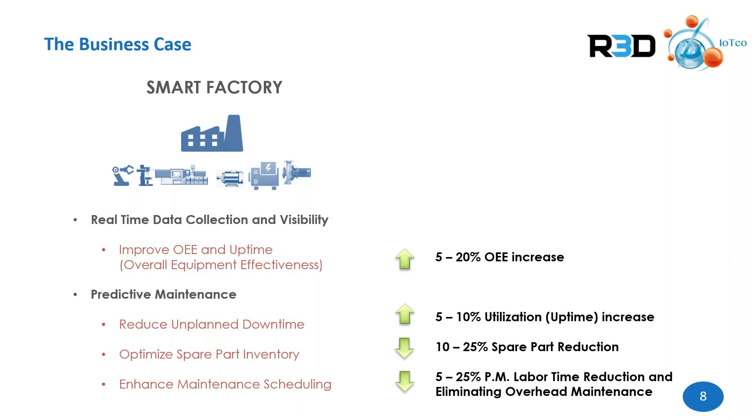So business case drives technology selection and drives the behavior and strategy of digital transformation. One of the first return on investment calculations we've ever done was with an automotive OEM with a lot of industrial robotics, where we deployed an AI predictive maintenance solution. And in that plant, the average cost of 1 minute of downtime was almost $10,000.

So it is significant. You're not making cars. If the line is down, you're not making cars. So if we are using AI and we're looking at how many failures actually happen in a year, let's face the facts, robotics don't fail all the time. They're very rigid equipment. But when 30 of them on average fail every year, with 30 minutes of estimated unplanned downtime...

...leading to such a single robot failure value that you see here, using predictive maintenance and having or even under promising the prediction accuracy down to just 50%, so only catching 15 of the 30 robot failures, this automotive OEM was able to achieve such a strong result from applying AI and predictive maintenance in their factory.

Now, I'm not saying that your 1 minute of downtime is $10,000, but think of what your 1 minute of downtime costs you, and how many unplanned asset failures you usually have per year. Simple math here based on uptime and based on prediction accuracies, which by the way can reach 80 to 90% in a real world setting, can give you a very quick ROI calculation by just looking at uptime improvements and moving towards a predictive maintenance approach.

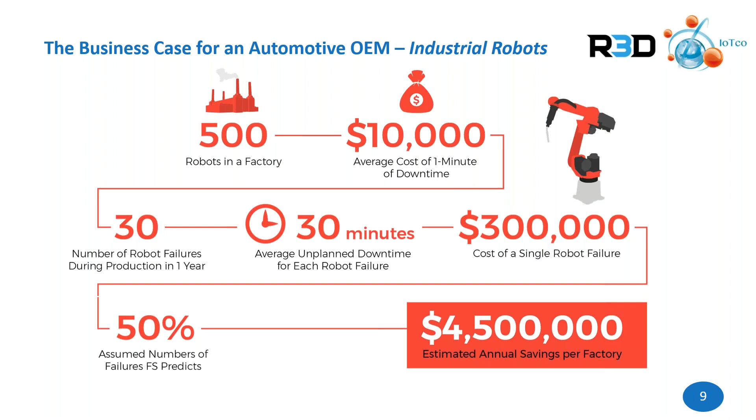So when we look at two case studies briefly, we always think, what is the value? What is the velocity of doing the work? What is the scalability of the work? And what's the ROI? These are the four key metrics that we look at to assess our digital transformation success.

And when we look at a company like MAXION Wheels, a predictive maintenance solution was deployed there in less than 3 months on 7 of their most critical asset types. That proved value within 6 months to the manufacturing company and was scaled as a template to over 10 manufacturing facilities in their steel division.

When we're looking at Bocar with high pressure die casting equipment, we're looking at high scrap rates. Artificial intelligence can be used not only to predict maintenance issues, but also to predict scrap and quality issues in the manufacturing floor. The casted parts are running with a cycle time of almost 10 seconds. So the AI solution has to make very rapid decisions in less than the cycle time of the part, within almost 6-7 seconds, to automatically scrap a part or accept a part based on big data collected from the casting cell, almost 50 parameters.

So here, we're not just telling them if the machine is going to go down, but we're actually prescribing to the machine to make a decision to accept or reject a part.

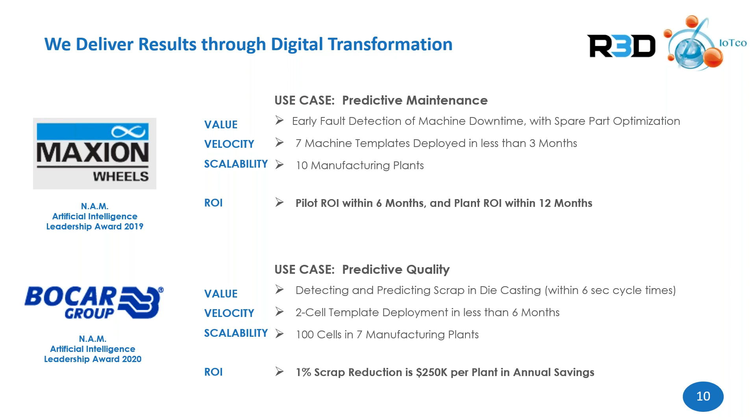The National Association of Manufacturers actually awarded both organizations the AI Leadership Award last year and this year. So ROI dictates technology and dictates the use case. So what is the technology behind all this?

We see a 3-layered approach. We always refer to the data lake. And if you don't have the data lake, it's important that we partner with you to create that for you.

So we're collecting data from the asset, the process, the quality, the workers, and in a standardized fashion, this data can flow into an artificial intelligence-based solution engine that can deliver you the use cases to deliver you that business case.

Predictive maintenance is focusing on the machine. Predictive quality is focusing on the part that is being produced by the machine. So we talk about predictive metrics, health of the machine and the components, and prediction of when the machine might fail before it fails - remaining useful life.

And on the scrap side, we're talking about, is this a healthy part? Green, yellow, red - is it going to pass? Is it a warning, a suspect, or a predicted defect on the part? And then what is the reason for that defect - is it a temperature parameter, a pressure parameter, that is leading to the failure on the part that I'm predicting?

So zero downtime, zero scrap operation is the vision that we have - a worry-free process for manufacturers to use connectivity and analytics and drive shop floor improvement. And we do it in a very systematic way. You do not need a data scientist or a PhD on staff to utilize these solutions.

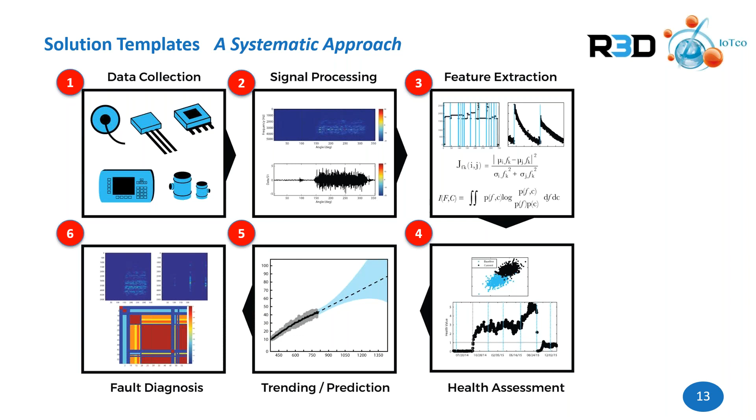And then how to train a machine learning algorithm that can learn the baseline and then trend the behavior, which is your health over time, and then start to offer predictions and diagnostics on what is the root cause of the failure and when the machine might fail before it actually fails, shifting away from a reactive approach and a time-based approach to maintenance to a more proactive and predictive approach.

So now the question becomes, there's a lot of variety of machines on the factory floor of different types and different ages and different processes. So there comes the idea of solution templates.

I have robotics on the factory floor with different axes, and each axis has a bearing, and the joints might fail as you're moving the robot over time. So predictive maintenance of each axis of the industrial robot, whether it's a FANUC, a KUKA, a Denso robot, it doesn't matter - robot agnostic.

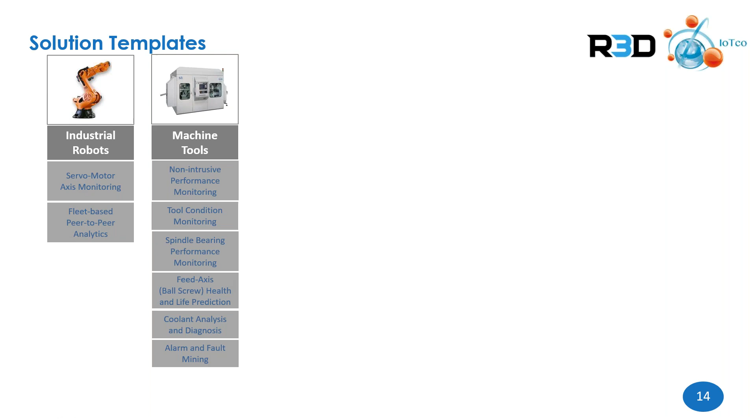I have machine tools, CNC machines. I have spindle bearings that might fail, or ball screw feed axis that might fail, or my coolant, my lubricant might degrade over time and cause an issue on my part. So a series of templates relating to CNC machines.

I have injection molding equipment and high pressure, low pressure casting equipment, where not only maintenance is important, but also predicting quality and defect issues is important.

I have stamping equipment, vibration-based analysis on specific areas of the carriage and the die may be crucial in a stamping area. We've also done projects where we use sound or acoustic to listen to the sound of the part being hit by the stamping press, and inferring from the harmonics of the sound - which you obviously can't hear with the human ear, but you can hear with a sensor - that this might be a bad stamp or the machine might be having a problem.

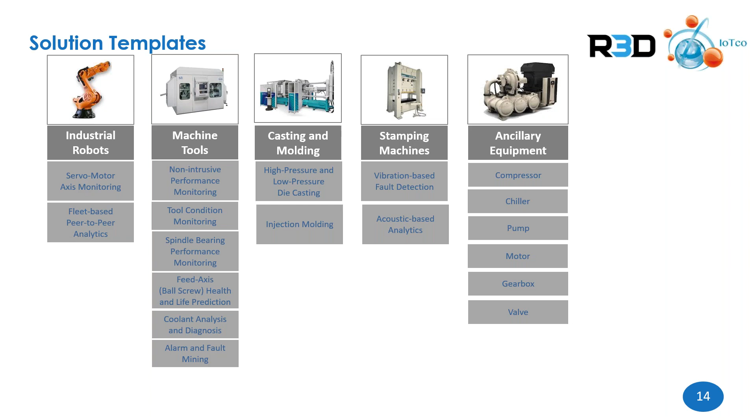So a more non-intrusive way, instead of having to mount and drill a vibration sensor, you're listening to the sound data. Or I have ancillary equipment surrounding the factory - compressors, pumps, motors, gearboxes - that might fail. So the idea here is a library of solution templates where the connectivity is well understood and proven, and the AI and the analytics recipe is well understood and proven.

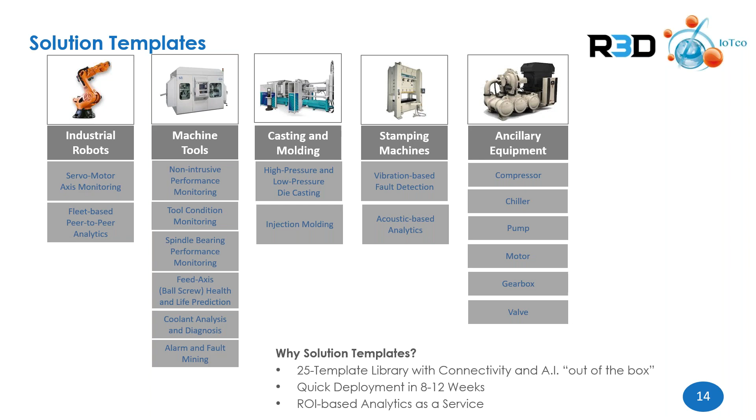Leading to rapid deployment in 8 to 12 weeks without the need of a data scientist or a PhD on staff that has to be able to configure these solutions. Our typical go-lives are very rapid, allowing customers to start using predictive analytics in a very rapid fashion, and then proving results in weeks.

So a very quick example, robotics. It's robot agnostic. When we look at predictive maintenance, we're looking at capturing belt issues, backlash issues, bearings, motor brakes, lubrication, maybe starvation issues on the machine.

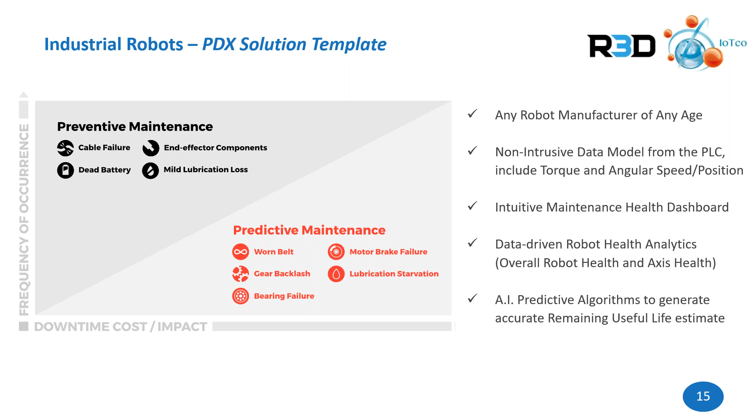These solutions should be intuitive. A maintenance person should be able to look at a dashboard and quickly make a decision without needing to be a PhD on staff. So when a maintenance person looks at a screen like this, they can quickly understand my asset is healthy because it is closer to the baseline.

My asset has started to degrade, and now I see a prediction window with an accuracy of when it might actually fail, and I have a 2 to 4 week window to actually react.

And I can see that my fifth joint or axis is going to be the actual key failure area on my robot. When we used to work at Toyota, we used to go and fix all 6 joints on all 6 axes of the robot in a standard operating procedure every few weeks. But with these solutions now, I can actually save labor time and save spare parts by going in and fixing a specific area on the machine, which is diagnosed by an AI solution.

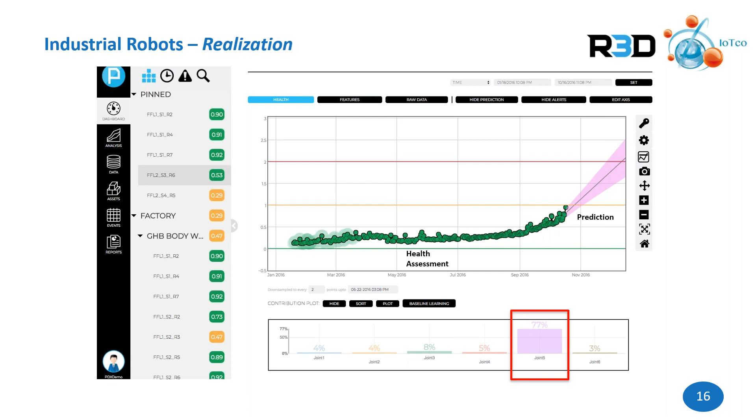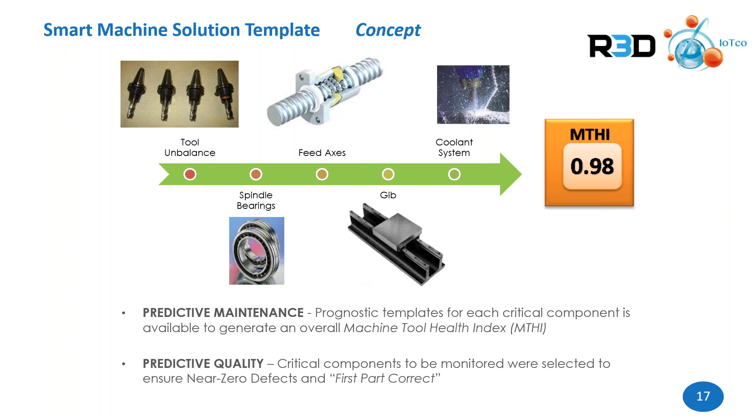When I look at a CNC machine tool, it is a more complex piece of equipment. You have a tool that moves, a feed axis, a spindle bearing, the coolant. So there are multiple templates and multiple areas of data collection that you would need here in order to deliver an intuitive solution with an intuitive dashboard to the maintenance organization so they can quickly see.

Hey, I want to look at my spindle. My spindle bearing has started to degrade. This is the remaining useful life of my spindle bearing. And I can clearly see that my SKF bearing has an 8 kilohertz frequency of failure, or BPFO, that's the outer race of the bearing or the inner race of the bearing.

So within a component like a bearing, we can even pinpoint very clearly which area of the bearing is going to fail before it actually fails. Very detailed or in-depth analytics can be achieved.

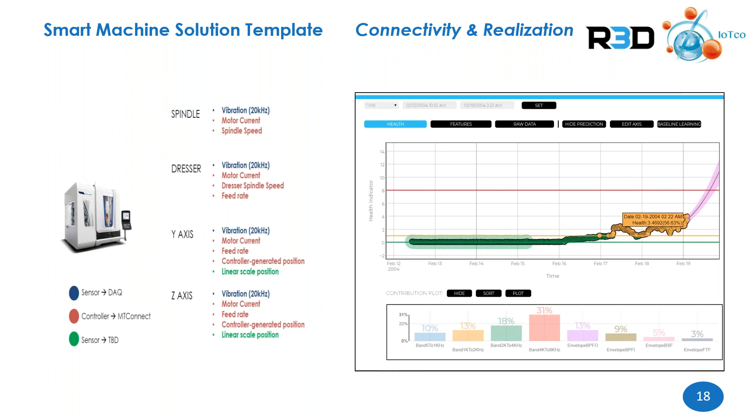So now that we're connected, now that we're collecting data, now that we're analyzing data, at the end of the day, such solutions can run standalone, but in many cases, we close the loop and we tie those solutions with a maintenance system so that the maintenance organization can use this data and these solution templates and start driving information to SAP PM, for example, to do predictive maintenance within SAP PM.

Most maintenance systems today are static and completely disconnected from the factory floor. So by having predictive insights and sending data to SAP, for example, we're able to support the maintenance team to optimize their PM schedule, assign labor to do the maintenance, and even order spare parts before they need the spare part.

So we've actually partnered with R3D on a special adapter to bring predictive insights like machine health, remaining useful life, and even requests for spare parts into SAP PM. And this is a very key integration that we're bringing out to all manufacturers.

So you can have proactive alerts and what we call predictive replenishment of actual spare parts, helping you reduce your spare part on hand and helping you reduce your labor time by having a closely knit integration with your maintenance environment.

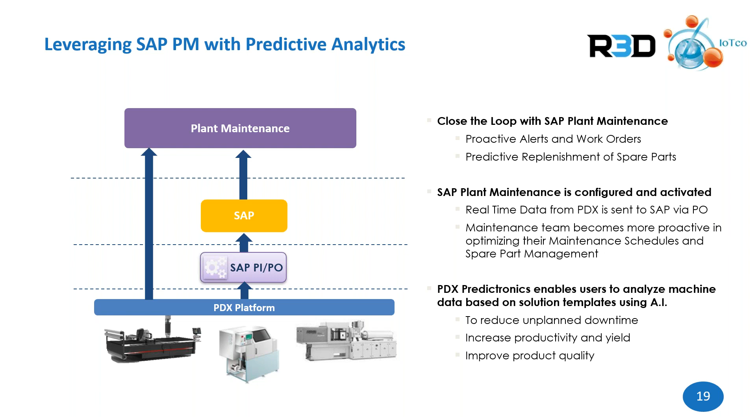So with this setting the stage of what's happening today in the industry, around ROI, business case, connectivity, analytics, leveraging your existing systems like SAP PM, let's set the stage for my good friend Isaac to tell you what their journey is and where they are today and where they want to be in the future.

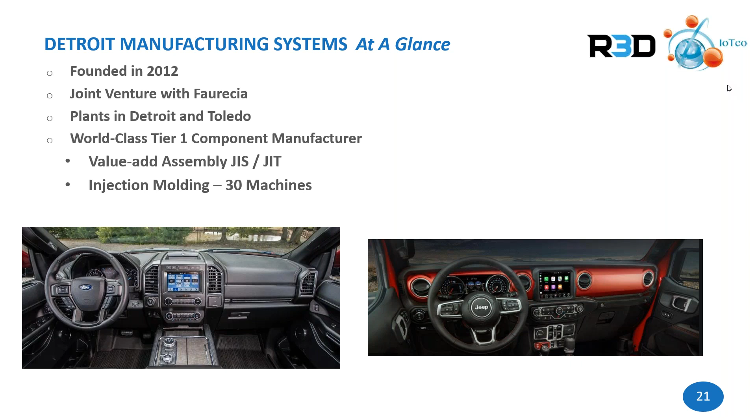I'm currently the head of IT at Detroit Manufacturing Systems. I have about 10 years experience in automotive. Before that, I did a lot of consulting with smaller businesses. Part of my experience is starting off in smart manufacturing, Industry 4.0, whatever you want to call it. For maybe the past 5 years, I've been delving into that and running projects having to do with that.

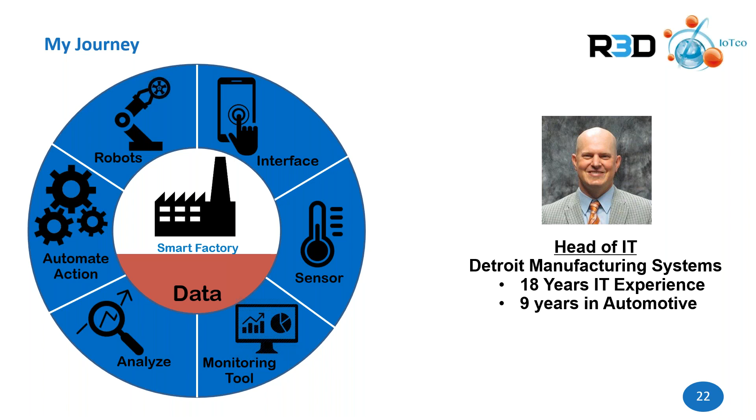Go to the next slide. I just want to give you a picture of what my journey was, and it'll give you an idea of where I come from, and also might give you an idea of what path you want to take. So I think it's important that I describe where I came from, what I am doing currently, and what I did in the past.

The journey really began with me managing plants and facilities in Europe, and then I also managed some plants and facilities in North America. The message I got while managing those facilities - and I managed the IT people, so let's get that straight, I was the IT manager or regional manager for Europe and for North America at one time - I managed the IT people in those facilities, in the plants, and that was really my first experience working directly on a manufacturing floor.

I'm big on communication, so I would often talk to the plant managers and see where I could help them. And the message that I got pretty often was, we need more help on the manufacturing floor by the IT department. In that process of talking about that and bringing that message to our CIO at the time, we decided as an IT department to come up with a presentation of how IT can help the manufacturing facilities directly on the plant floor.

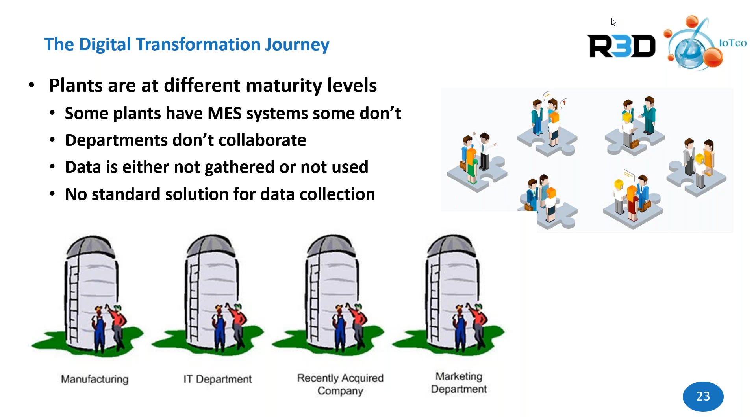So Mo, you can go to the next slide. As we went down this transformation and IT started looking at this stuff, it's very easy to get overwhelmed looking at the Industry 4.0 framework, the Industry 4.0 picture. There's a lot of different technologies that we started looking at, and we ourselves were a bit overwhelmed - how can we do Industry 4.0? Because it's such a huge concept, from cloud computing to augmented reality to smart sensors, data analytics.

In fact, I started back then - I think I was one of the first guys on the block to get an Amazon Alexa device, and I started buying smart devices for my house and seeing what I could do by talking to Alexa. And that for me was a microcosm of what you could do, or possibly do, in a manufacturing environment.

But also we quickly realized that, okay, let's look at the core concepts of Industry 4.0, and Mo alluded to it, it's data and analytics.

And I would add one more to that, which is connectivity. But all of those devices and all of those things that you're doing in that framework of Industry 4.0 is going to generate data.

Now you hear the thunder. Hold on, let's at least minimize the background sound effects.

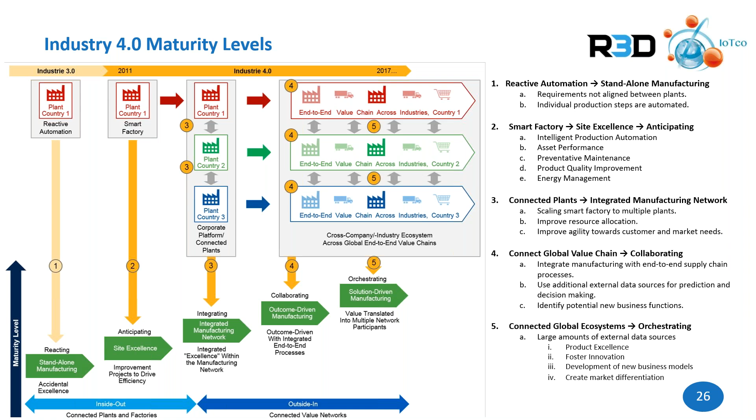Go to the next slide.

And Mo alluded to this. The second issue we discovered rather quickly, as we're doing this analysis of our plants and where our plants lie, is—and this is also part of the silo conversation—very much the IT domain and the operation technology, the OT domain, are separated. In this day and age those walls are crashing down. So we quickly realized we need to get as much collaboration as possible between those devices on the plant floor and the people taking care of those devices and the IT domain.

Specifically with Detroit Manufacturing Systems, they had an old MES that was mainly run by the IT department. So we're looking at a more modern manufacturing execution system that will give us that connectivity and flexibility. But it's also really important to me that we, as an IT organization, involve as many people from that plant floor who know those machines, who know the PLCs, who know the data coming out of those machines, so that they're very connected to that manufacturing execution system. They understand that data better than anybody coming up through that plant floor. And then they team up with IT on how to get that data out of the plant floor and use it across the value chain of the business.

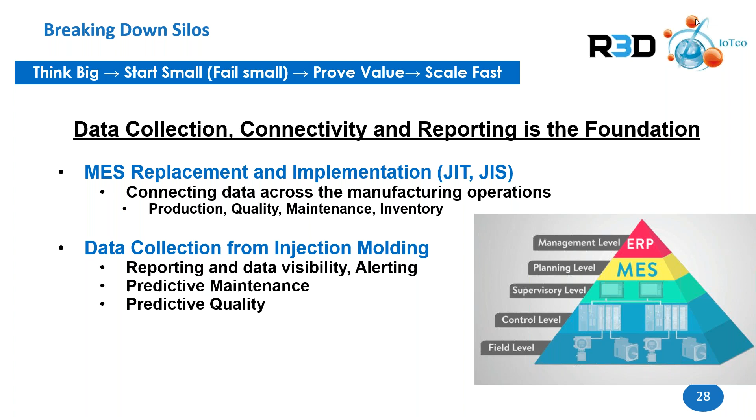So this is more pictures of the MES system that we're putting in, a more modern MES system. It's based on HTML5, so it's web-based. We can put it on any screen we want. It does all the integrations that we need to. We can integrate into the ERP, which is SAP. So we integrate into SAP.

We are looking at integrating into our supply chain group. We're looking into integrating also into our quality. So there are a lot of different things that we can do with this new MES system. You can go to the next slide.

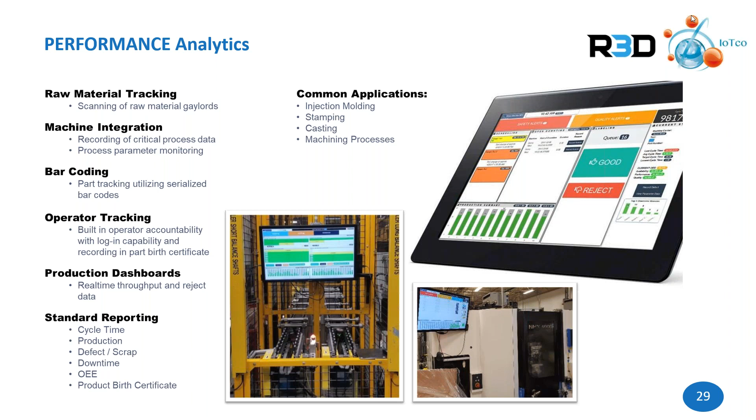So predictive analytics. We're very much saying, okay, we have all this data. What do we do with the data? I can give you a perfect example, and I think this fits along with what Mo was talking about when you're thinking of where to start. When I was with MAXION and we were looking at where to start, I wanted to very much match - I have to justify spending money on a project like this. So I very much wanted to match what we were doing with these new technologies with the business.

So we walked in, and don't think that you have to have the very best technology ever in a plant to start doing Industry 4.0. This is why I tell this story, because the facility we walked into had some very old machines, I would say close to 50 years old. They did their job - stamping machines, roll forming machines. They did their job, but when that machine broke down, it caused a big problem.

You talk about downtime and how much money that could cost, and I don't remember how much money that cost when that machine went down, but it was a problem that it would go down. And so we went in there and talked to the people on the plant floor and got the guys straight from the plant floor. Leadership is important, but the guys on the plant floor really know what's going on.

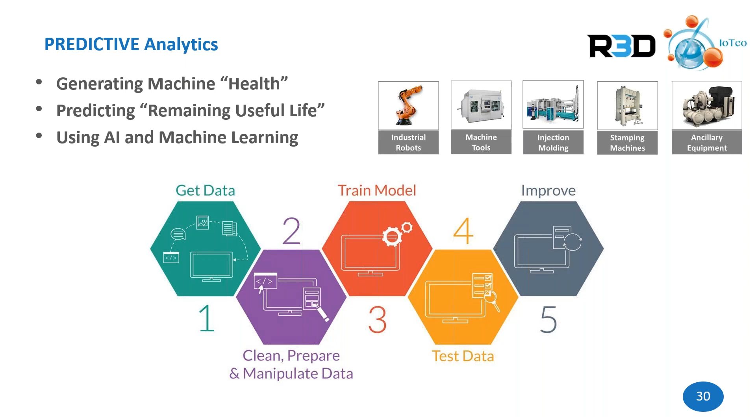And the great story about that is that once they got the model running, they were able to predict the machine would fail in 10 days. And just as they predicted, the machine failed in 10 days. The value from that - being able to predict, specifically with the upper tooling and lower tooling of that specific machine - had a lot of value for them in that facility. You can go to the next slide.

So, finding a proof of value project—this is what I talked about with that project we did in that facility with that very old machine. Think big, start small, prove the value, and scale fast. You don't want this to turn into a data science project or drag on forever. What I learned quickly is if we can find a specific problem, even a specific part of a machine, that can be replicated across the company, to different plants, or to different machines, that's where I want to start. If you can show that part is a problem and it can take down a line, it's very easy to show the ROI and the business case behind that.

So we got together and found a specific problem with a specific machine, for those people on the plant floor who understand the problem. We conducted workshops, sat down with them, and focused on a very specific issue. Then we ran out and started to work and see if we could prove value, reviewed what we'd done, and then took it to the business. I think it was pretty easy to sell once you can prove that return on investment.